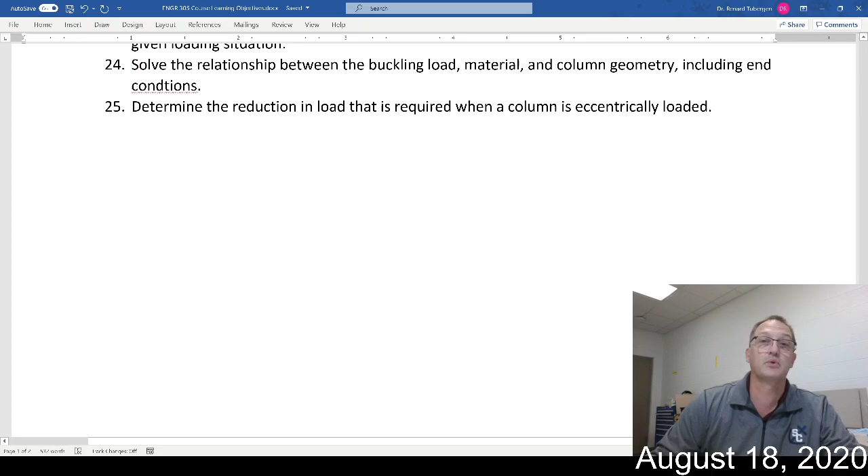This list is very specific, and you'll see it's a bit longer. If I zoom all the way down to the bottom, there are 25 different things that I want to point to and go, these are things that you're going to learn. And so there you go, okay, I understand what I'm accountable for during the course of the semester and what I have to do.

Now, some of these are fairly straightforward, some of these are not, but these should lay out, if you want to know where we are in the course and what you're accomplishing, what we're working towards. Often in the lecture, I will point to, we're working on goal number 12, and then specifically we'll be working on that particular item. So my learning objectives were done to get us all on the same page about what we're trying to accomplish.

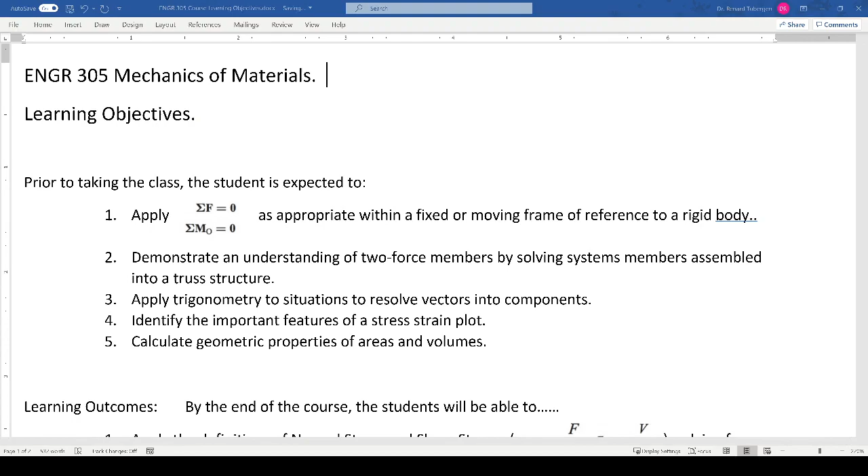Oh, I didn't mean to put that there. I meant to type a 2 over here because that changes the scene.

Prior to taking the class, a student is expected to apply the sum of the forces and the sum of the moments is equal to 0. That is, I need you to be able to solve a static body problem. The reason I've limited it to statics is dynamics just makes it a little more complicated. If you can do the statics, you can do the dynamics.

I want you to be able to demonstrate an understanding of a two-force member. I want you to show me that those forces only act along the line of the two-force member between the 2 connection points, even when they're assembled into a truss structure. If you remember, that has some assumptions associated with it, but that's okay. I want you to be able to use trig to look at situations and resolve vectors into components.

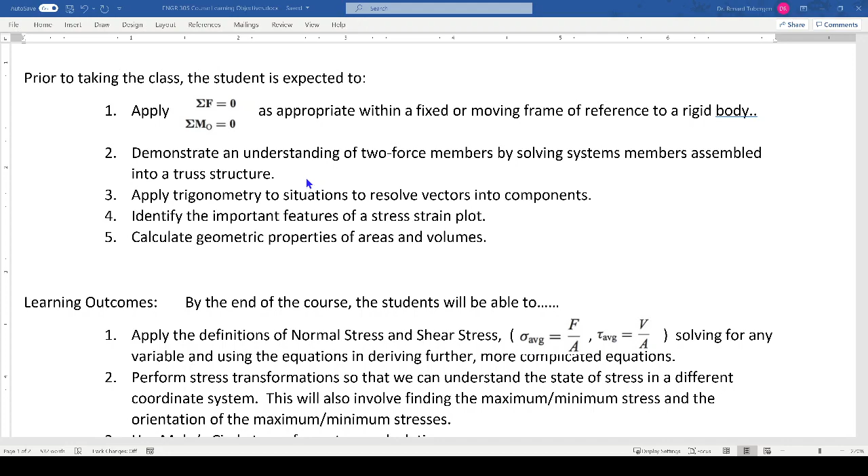I want you to be able to identify the important features of a stress-strain plot. That comes out of material science. That's not a 202 statics and dynamics problem. And I want you to be able to calculate geometric properties of areas and volumes. Technically, that's calculus. We will figure out some tricks, and you probably know a lot of them, but that is some calculus. So you can see in a big picture way, we're incorporating calculus, material science, statics, and dynamics into this class.

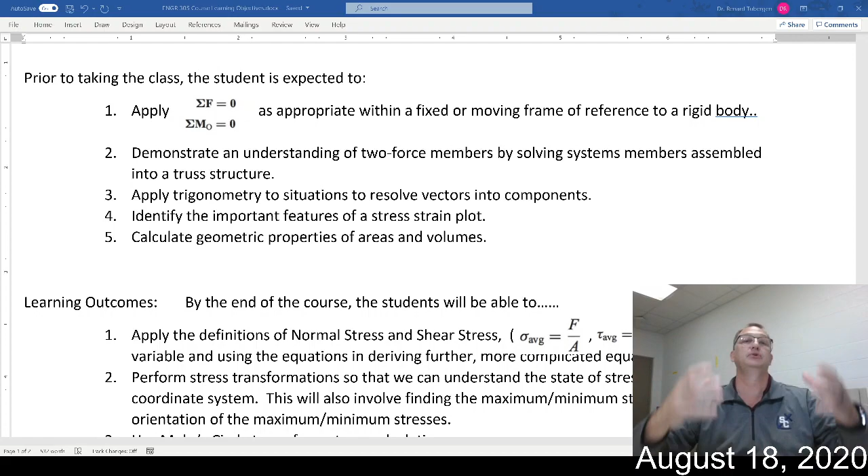Now, by the end of the course, students are going to be able to, and here starts our list. Number 1, apply definitions of the normal stress and shear stress. These equations are equations I would like you to have memorized, and I'm going to quiz you. So when we talk about quizzes for recall, look for those items to show up. You'll see another one down here, strain, shear strain. Apply the definitions of normal stress and shear stress, solving for any variable and using the equation and deriving further more complicated equations.

And we can walk through these one by one, but we're going to do that throughout the course of the semester. Know this document is available. I'm going to post this in the Teams administrative section, and you'll be able to see how this plays out during the course of the semester.

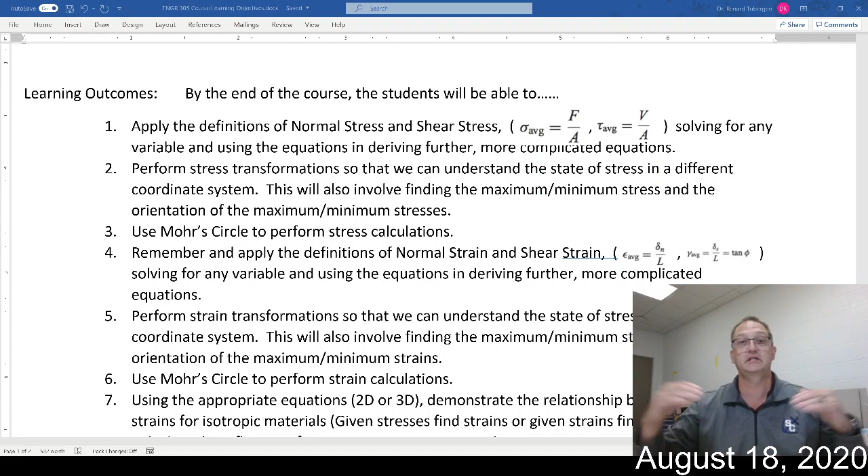What I will try to do, and every semester I'm trying to be more and more organized on this, is look at each lecture, and when I'm preparing it, whether that's a PowerPoint or a piece of paper with a document camera, I will try to make sure that I'm referring to the specific learning outcome that we're working towards so that you see in the big picture of things where we are. This list goes on and on.

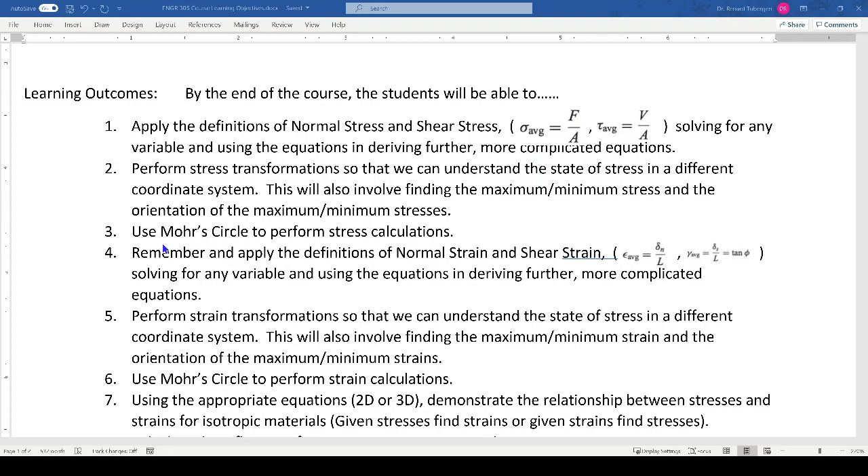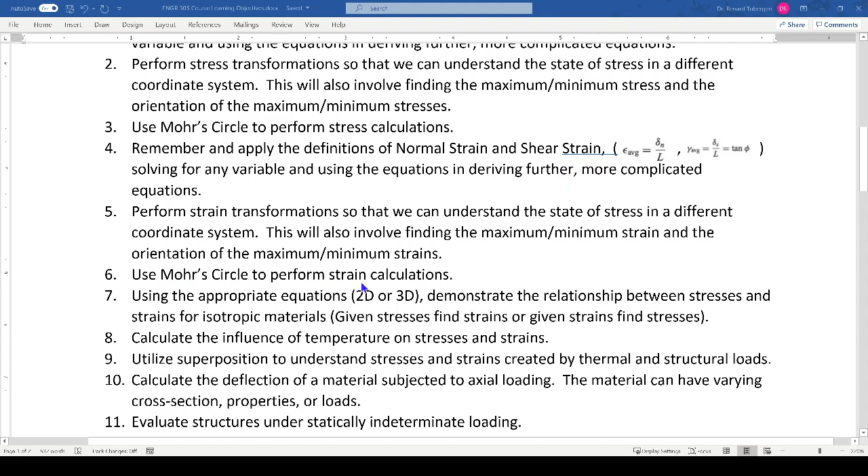Perform stress transformation, use Mohr's circle. These things shouldn't make sense to you right now because we haven't learned them, and we will be coming to them. I can look at that and say, apply definition of normal stress and shear stress, that's chapter 1. Perform stress transformations, that's chapter 2. Use Mohr's circle, chapter 2. Remember and apply definitions of strain, chapter 3. Strain transformations, chapter 3. Mohr's circle for strain, chapter 3. And I can keep going because I've gone through this a couple of times.

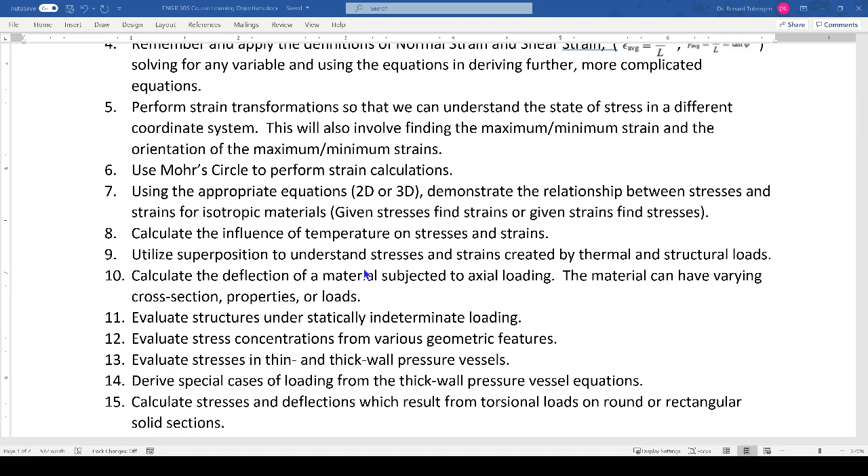So, but I want you to understand there are very specific goals that I'm working toward. Boom, boom, boom, on down the list, all the way to 25.

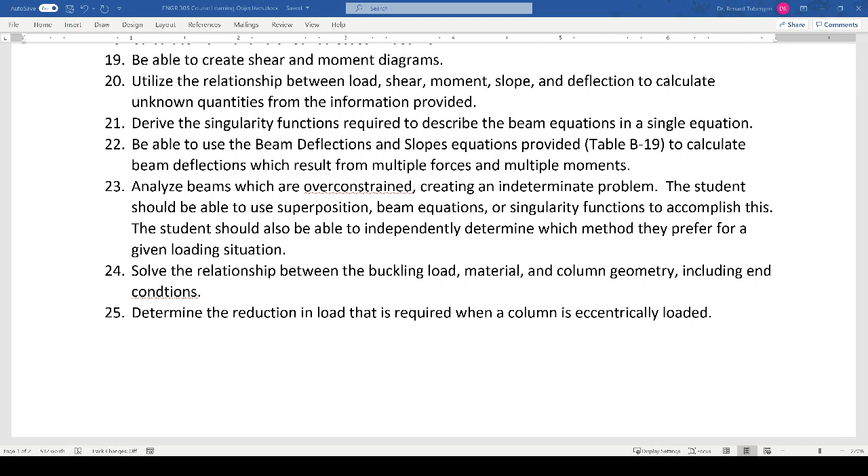Now, in conjunction with this sheet, I've got another sheet, and it looks like, oh, maybe you don't get to see it. Hold on a second while I pause. It looks like this. Engineering 305, Mechanics of Materials Study Guide. And this lays out the equations that we're going to be using throughout the semester to accomplish all of the things that are part of those 25 objectives that I would like you to learn.

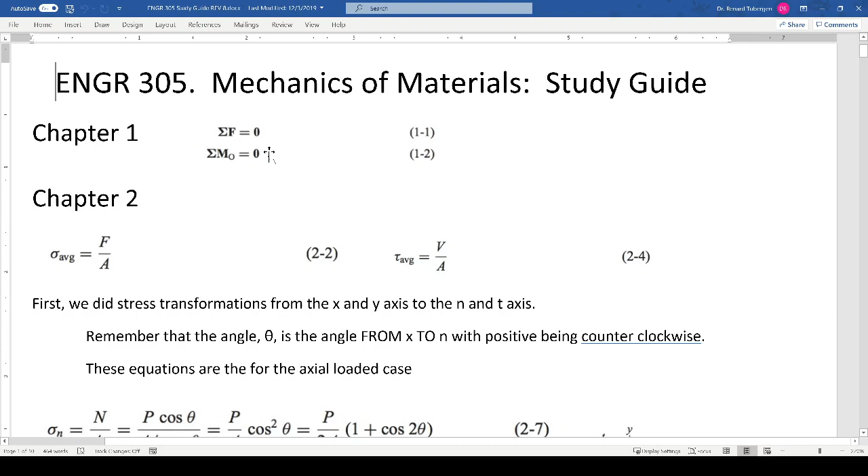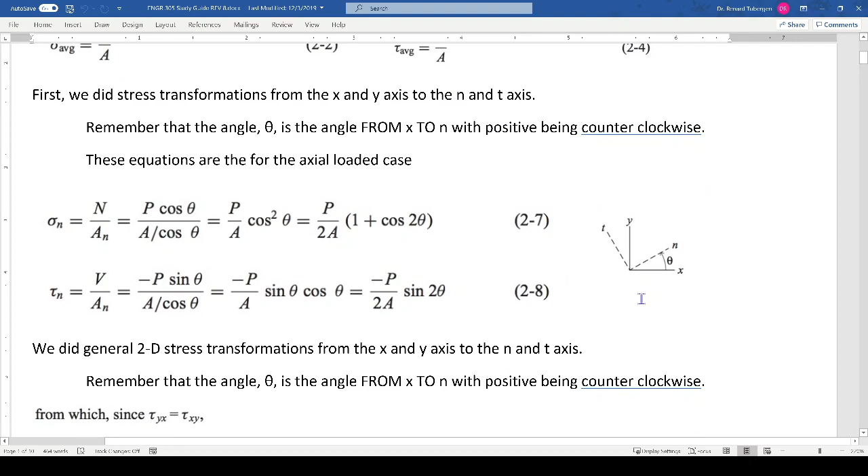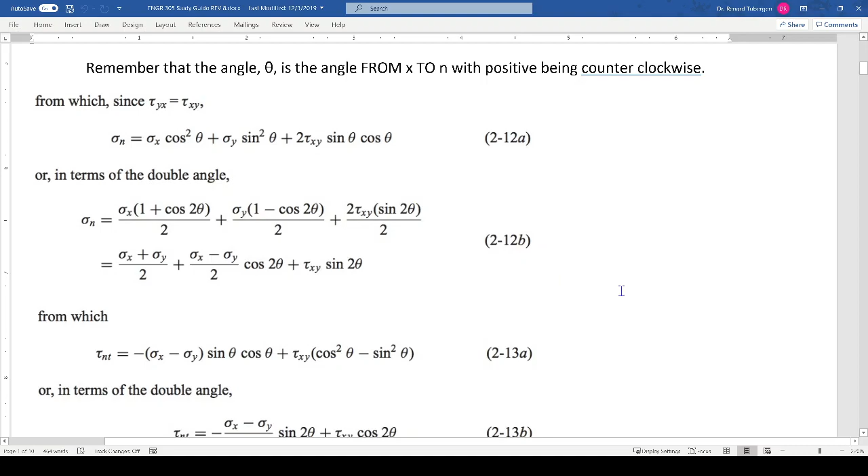So from chapter 1, that first objective, you are going to be held accountable for statics and dynamics knowledge. Here we go. Chapter 1, statics knowledge. Sum of the forces equal to 0, sum of the moments equal to 0. Here are the equations we need from chapter 2 and some other stuff we're going to get into. Chapter 2. This is a big chunk of chapter 2. Big stuff to think about. We keep going on, chapter 3.

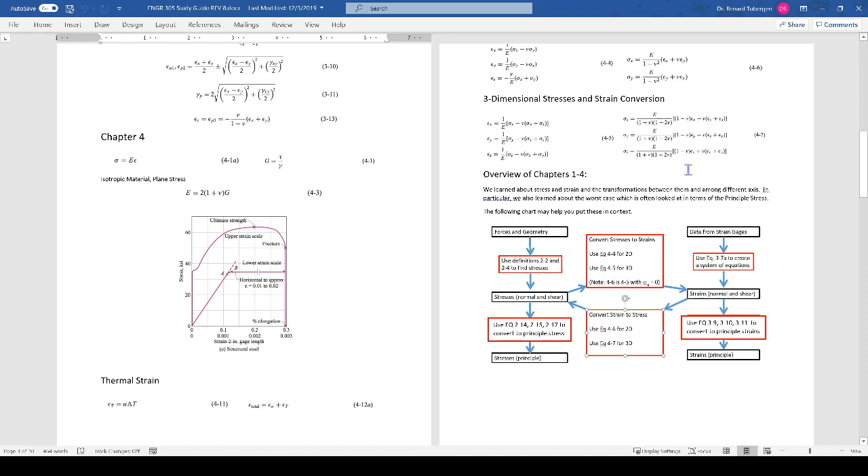And this document, I'll shrink this until it goes to 2 pages. Hey, look at that. It won't go to 2 pages. Oh, man, it goes to 5 pages. There's chapter 3, chapter 4. You can see we get some fun equations. You're going to run into some stuff bigger than that in thermo, but good stuff. Here's an overview. Here's everything we're going to learn in a picture for chapters 1 through 4.

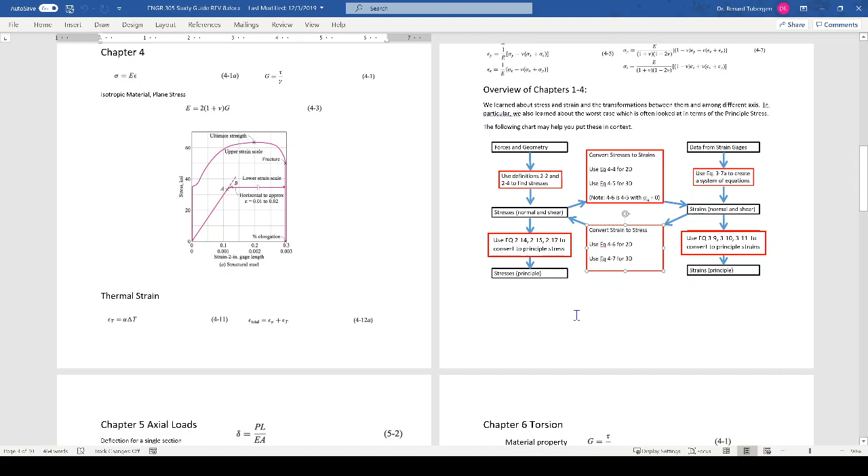And that is what there used to be a big test. That is a summary of what those chapters are and would have been the first test if we weren't going to the new format. Chapter 5, chapter 6, chapter 7 and 8, and then an overview of chapters 5 through 9, because there is parallelism in the course.

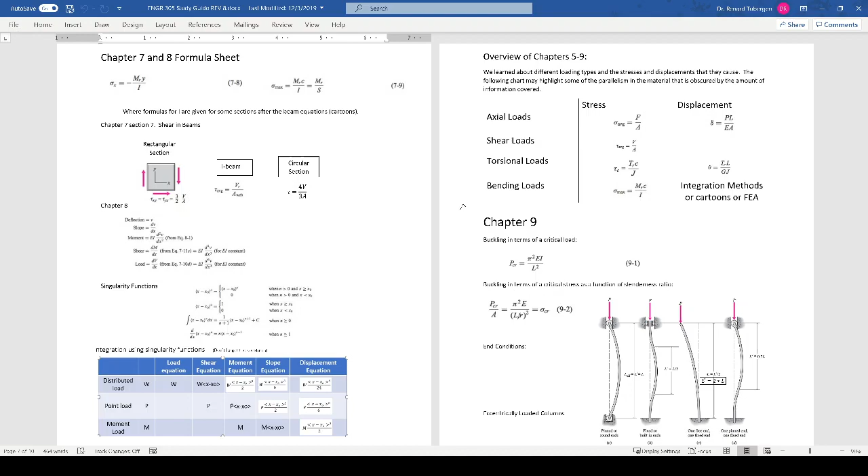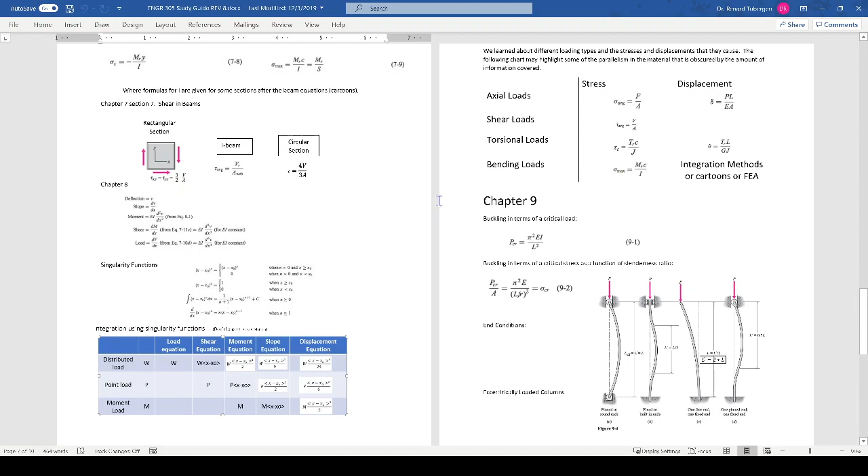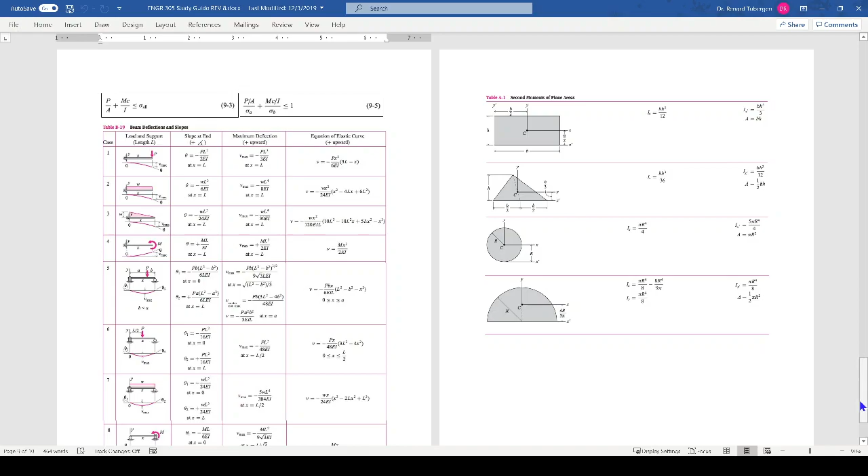You will hear me talk about the literary elements of solving a problem. This course has some of those same elements of a story playing out in how the textbook was organized. So 1 through 4 come together as a section, 5 through 8 come together as a section, and then chapter 9 kind of stands out on its own, and chapter 10 also stands out on its own. There are some other equations that we'll run into, and these show up in chapter 8, and moment properties, second moment of plane areas, show up in a couple different places. We may want those, so I've included those.

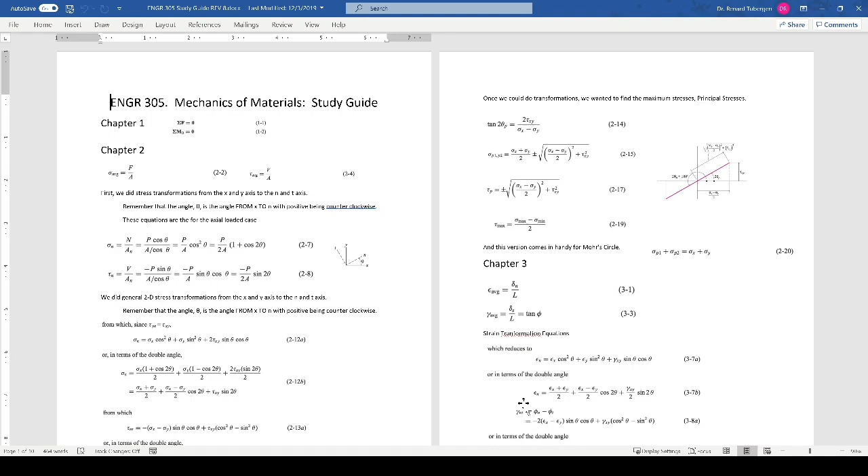But those 2 documents should help you stay oriented to where we are and what equations am I going to be held accountable for. Now, that also means I want you to understand what's on this sheet. I want you to be able to understand and work with these equations without the textbook, so you don't need to go back to the textbook for guidance on how to use the equation, and you come to a test and a quiz ready to use this document.

So this would be available, and I will allow you to make notes on this document, but I would plan on printing this out, and as appropriate, maybe take notes on this throughout the semester so that it continues to add value to you. Now, I'll point out, you can see it at the top of the page. It's not very clear on your screen.

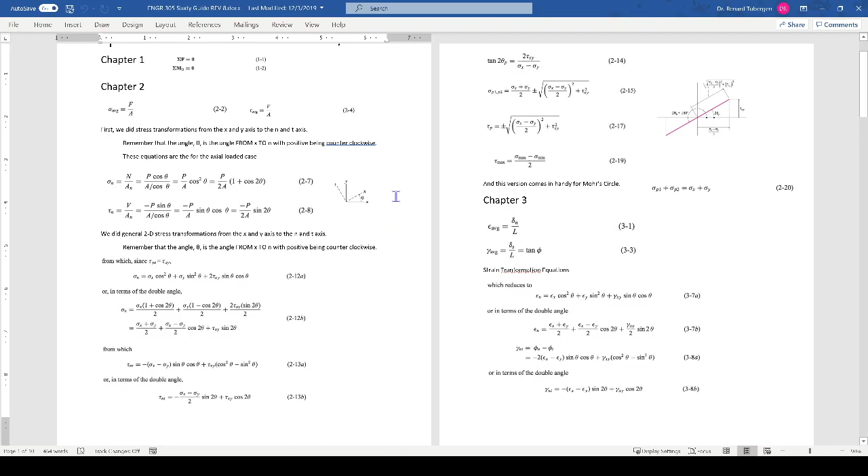This is the 8th version of this document, and that's come about because some years we add a new equation, some years we fix a typo, and some years we add further information to help explain some of these things. For example, on page 1, this little coordinate system right here got added. Oh, it's black on this one. That coordinate system got added recently because it helps explain how we arrive at that angle theta and how theta is measured. And if we get that wrong, the whole system is wrong. So we made a new version where we included that information so that things would be more clear.

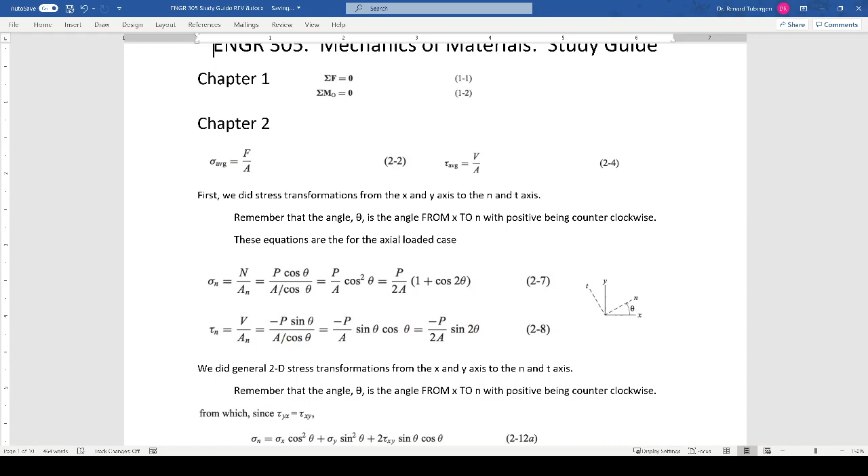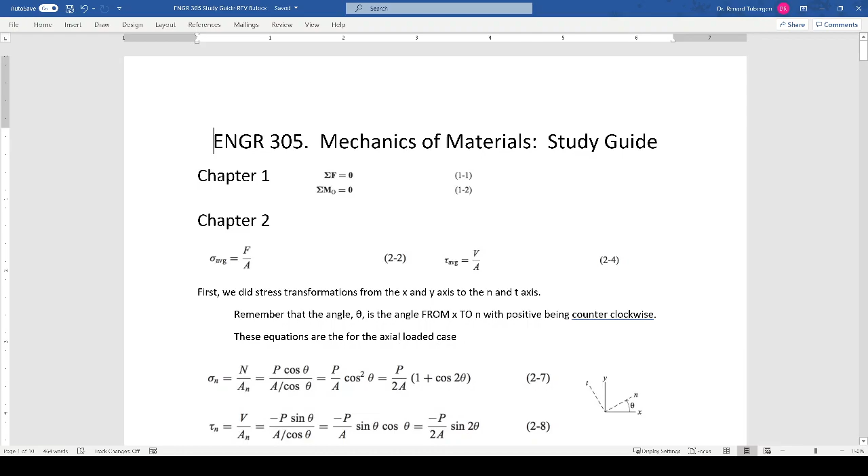So this document and the other document on the learning objectives are going to be posted in the administrative section of Teams. They will be posted as PDFs, but you can open and edit those. And if you would like to make suggestions on changes, I would be more than willing to entertain those.